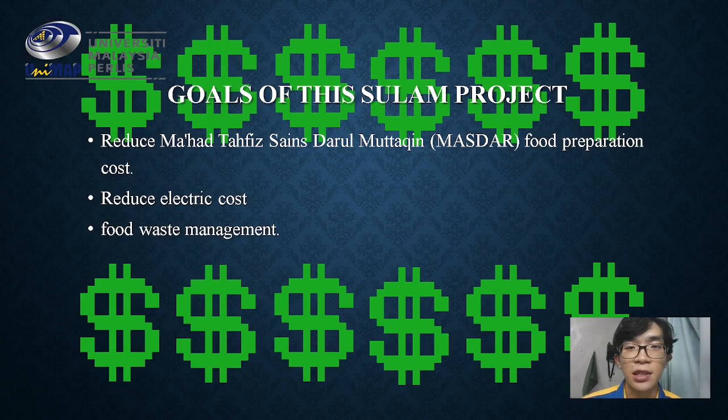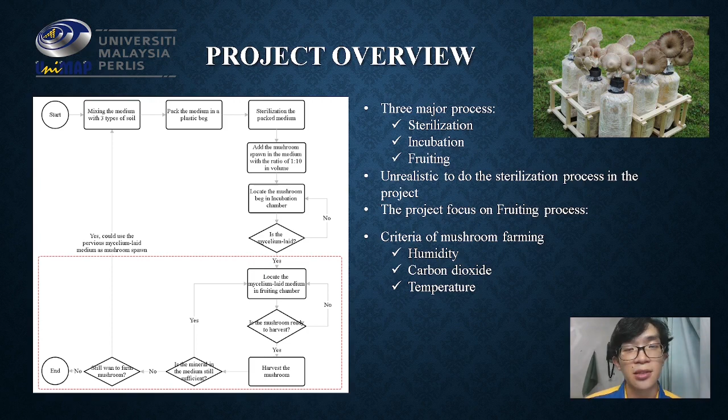The main goal of this Sulam project was to reduce the operation cost of the MASDAR. After we did some research on mushroom farming, it can be divided into three major processes, and we found out it is unrealistic to do the sterilization process, which is the most important one, to prevent the mushroom being outcompeted by other species. So our system is mostly focusing on the fruiting process only, and the criteria of mushroom farming were humidity, carbon dioxide, and temperature.

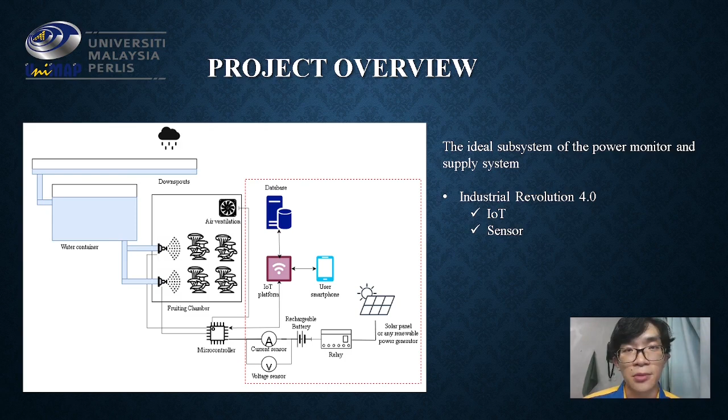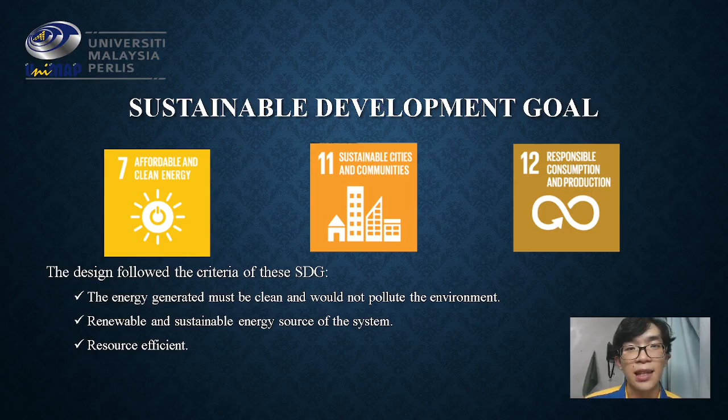The design will follow the criteria of these SDGs, as the power generated must be clean and will not pollute the environment, so we will not release any toxic gases into the air. It will be a renewable and sustainable energy source, which will not use fossil fuel, and our system must be resource efficient, so we do not waste extra electricity or water.

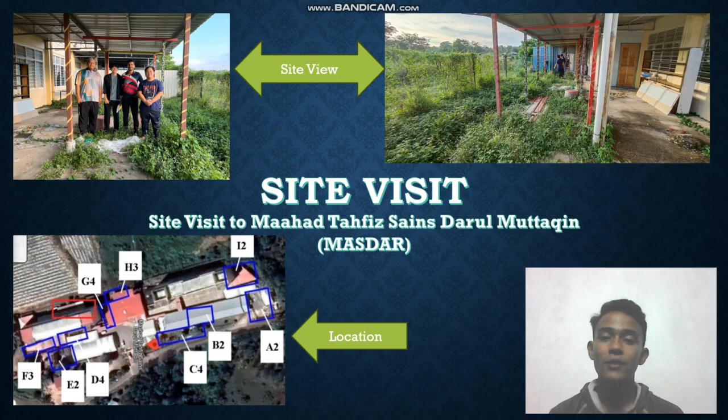Today I will present about the site visit to Maahad Tahfiz Sains Darul Muttaqin, or MASDAR. Our group has been informed to do our project in the red square area as shown in the picture on this slide. After visiting this area, we found that there is no power source in this area and insufficient water flow to install a hydro-powered turbine as our power source.

But after we observed all areas on this site, we found there are some open areas. With these open areas, we can install our solar panels, and then we can use solar energy as our power source.

Another thing is that there is a water piping system in this area. With this piping system, we can use it as a water source for watering the mushroom farm, to keep the mushrooms getting enough humidity to keep growing.

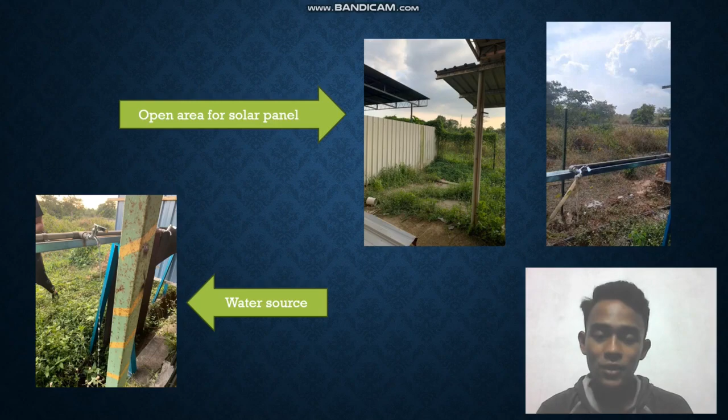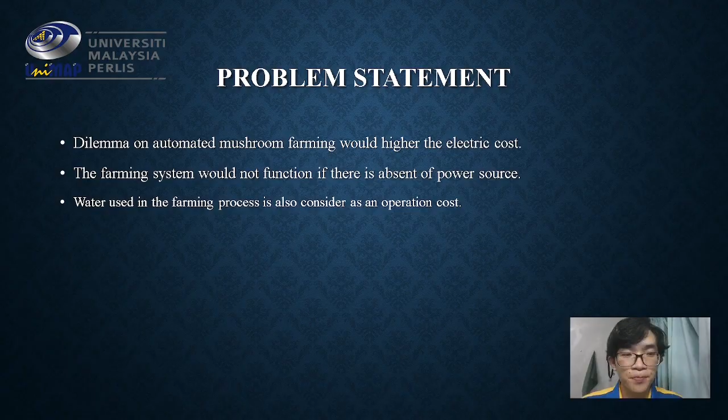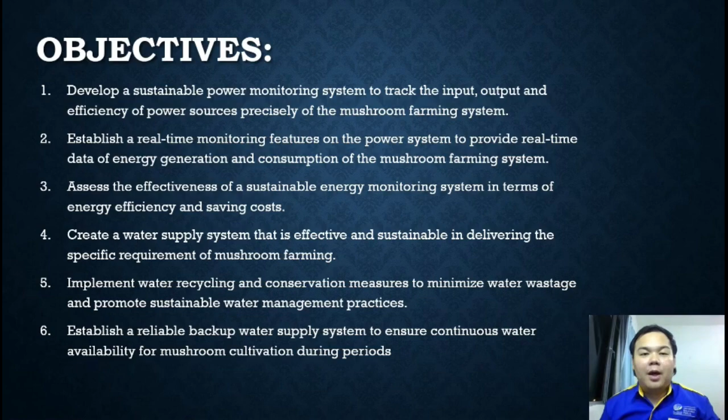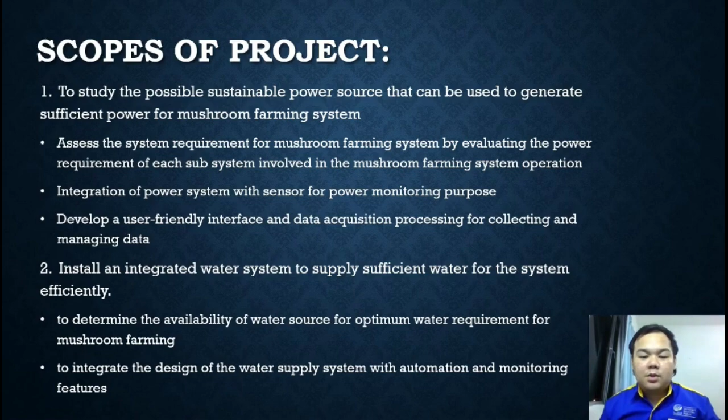Next, to achieve all the objectives, the scope of the project is divided into two main scopes, where each scope has a few deliverables. The first scope is to study the possible sustainable power sources that can be used to generate sufficient power for the mushroom farming system. The second scope is to install an integrated water system that can supply sufficient water to the mushroom farm efficiently.

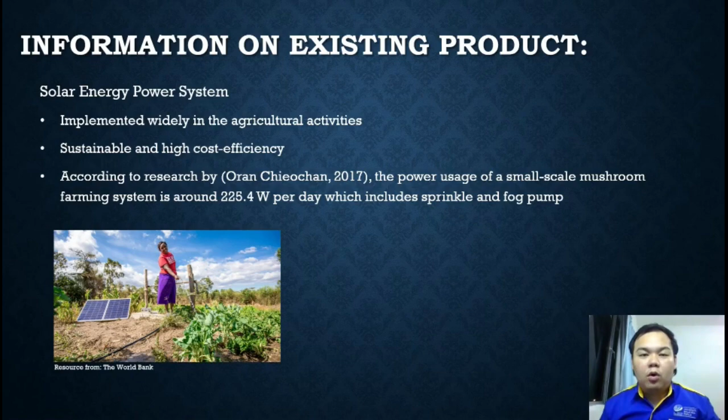Next, our group has agreed to go for a solar energy power system as our power source, as it has been implemented widely in agricultural activities due to its high sustainability and high cost efficiency. According to research by Oran Chieochan in 2017, the power usage of a small-scale mushroom farming system is only around 225 watts per day. This means that a 300-watt solar panel kit is enough to power the whole small-scale mushroom farming system.

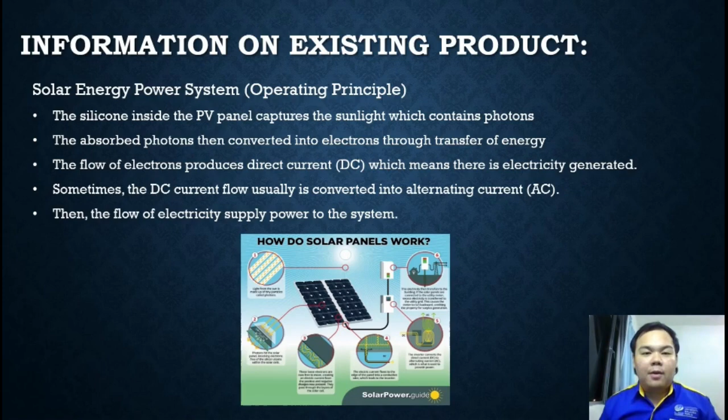How does a solar energy power system work? The solar PV panel captures the sunlight and converts the photons into electrons, and the electrons produce current, and the current is supplied to the whole farming system. In this solar energy power system, there are a few components, and the first one is the solar panel, which is used to convert sunlight into electricity.

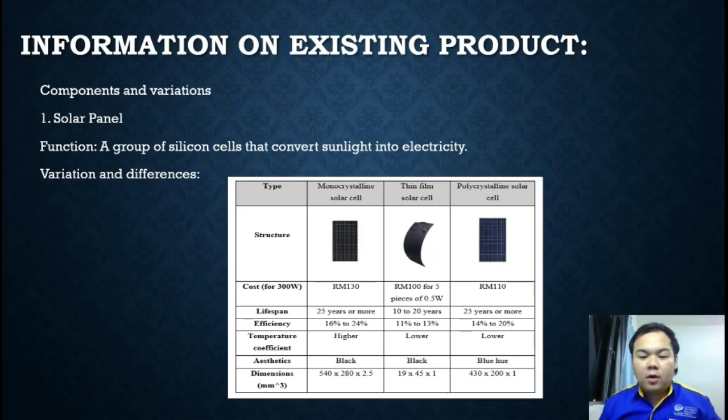There are a few types of solar panel: monocrystalline, thin film, and polycrystalline. As we can see in the table in the slide, polycrystalline is the best option due to its lower price but relatively high efficiency. Next is the battery for energy storage, which is used to store collected solar energy. There are two types of batteries: lead acid and lithium ion. We can go for the lead acid battery due to its low cost, as our project is on a budget constraint.

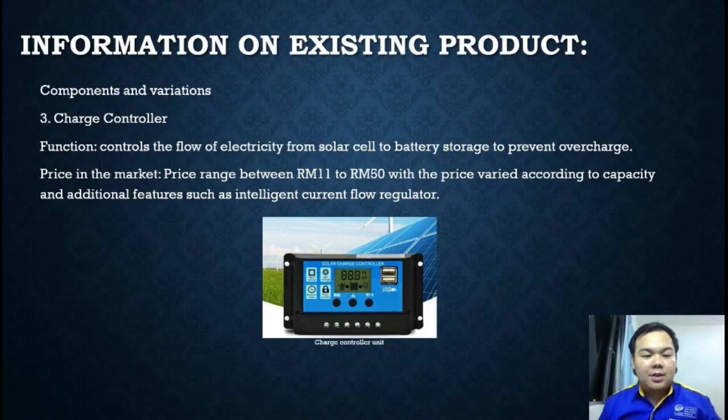Next is the charge controller, which is used to control the flow of electricity to prevent overcharge. The price range is between 11 ringgit and 50 ringgit, varying due to capacity and additional features. The last component is the inverter, which is used to convert direct current into alternating current. The price for an inverter ranges between 36 ringgit and 78 ringgit, varying according to the power capacity of the inverter.

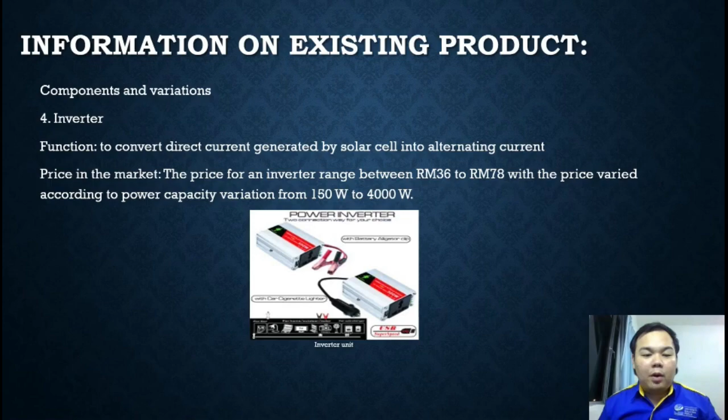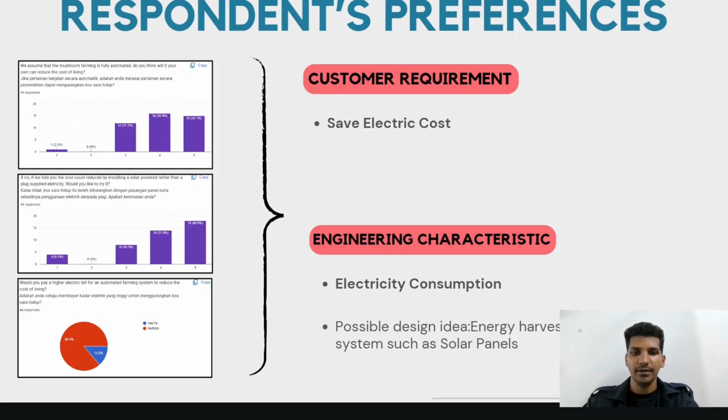Looking at the next survey result, more than 70% of the respondents prefer a 10-hour rechargeable battery that can last without charging from the solar panel. The customer requirement here is a reliable and durable battery. Converting this into engineering characteristics, we want a high capacity battery to store more energy and a high life cycle battery that can be used multiple times without capacity loss.

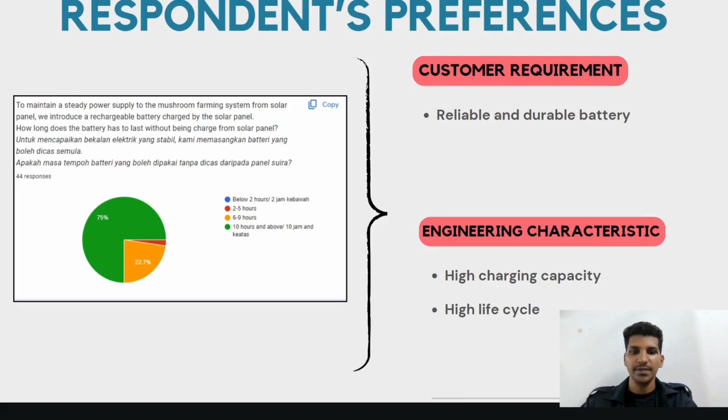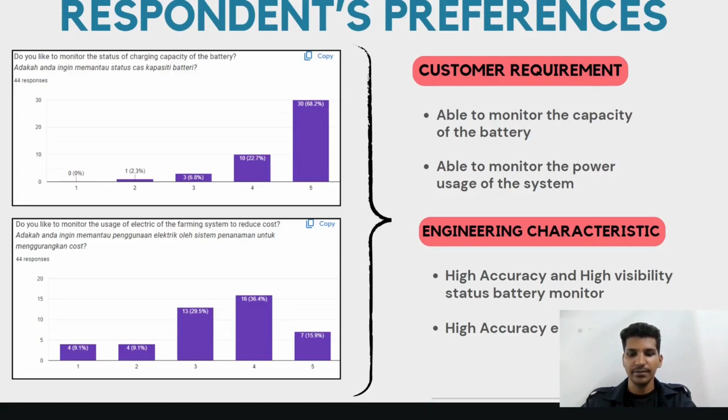On average, most respondents agree to implement a monitoring mechanism. So the customer requirement here is to be able to monitor the battery capacity and the power usage of the system. The engineering characteristics required are a high accuracy, high visibility, user-friendly battery monitor, as well as a high accuracy energy metering mechanism to ensure an accurate reading on the monitor. So that concludes our market survey analysis.

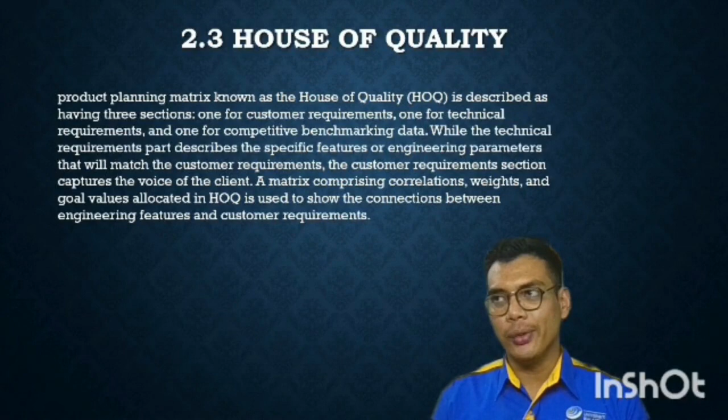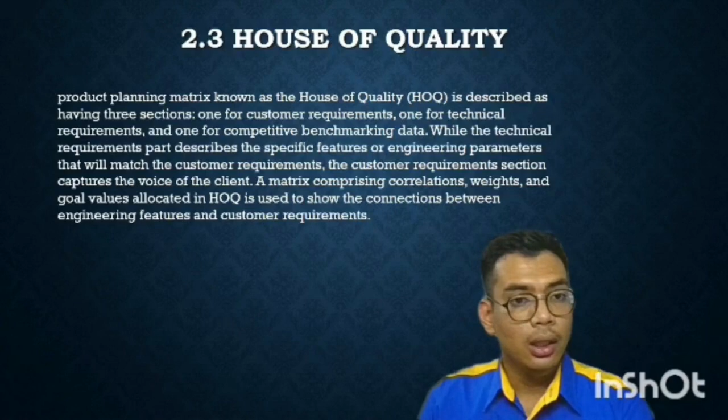Thank you. My name is Nabili Imran Mizani, matric number 211110760. I will talk about the house of quality, or HOQ. The HOQ has three sections: one for technical requirements, one for competitive benchmark data, and one for customer requirements. The technical requirement part describes the specific features or engineering parameters that match the customer requirements. The customer requirement section captures the voice of the client. The matrix comprising correlations, weights and goals are allocated in the HOQ.

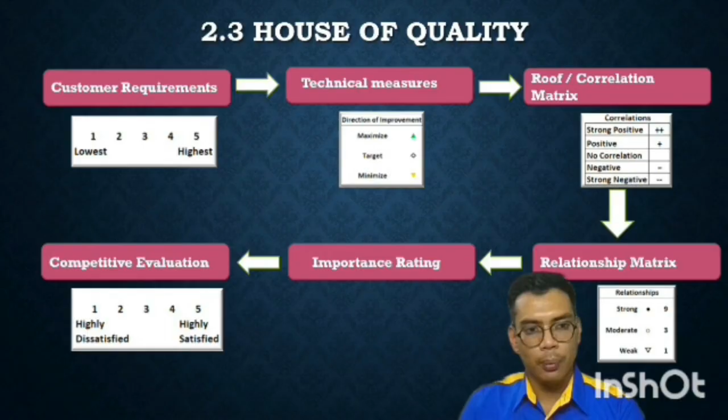Steps to deliver the HOQ: first, the customer requirements; second, the technical measures; the correlation matrix; the relationship matrix; the importance rating; and lastly the competitive evaluation. The relationship between engineering features and customer requirements is shown by the yellow zone: 9 is strong, 3 is medium, and 1 is very weak. The engineering requirement rank is the red row, indicating relative significance according to client need. The importance rating, calculated as the sum of each column multiplied by the customer importance factor derived from the market survey, is presented in the green zone.

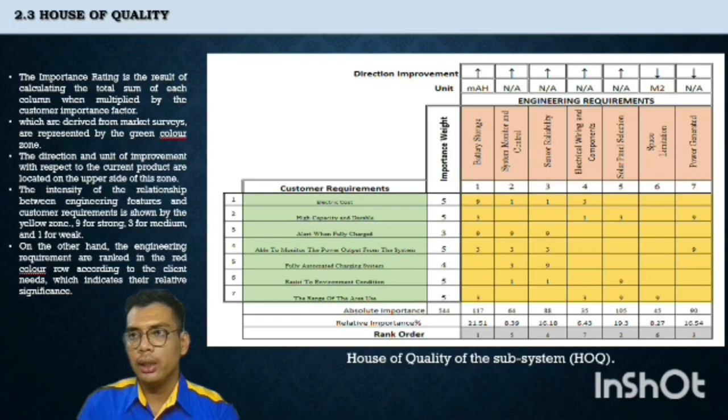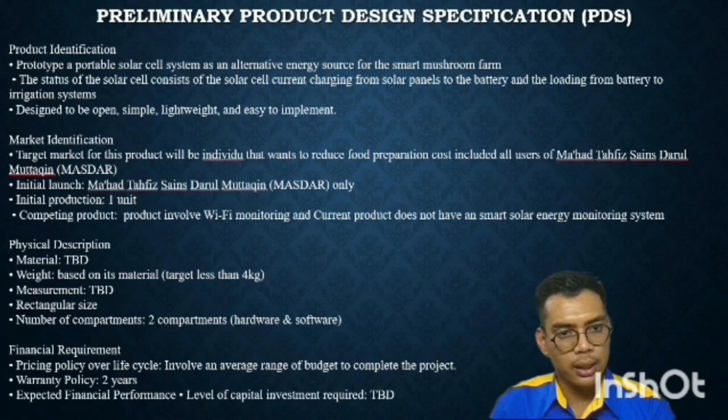Physical description: material to be determined. Weight based on the material, target less than 4 kilograms. Measurements to be determined, rectangular size. Number of compartments is two, the hardware and software. Financial requirements: the policy involves the budget range and competitiveness of the project. Guarantee will be given for 2 years.